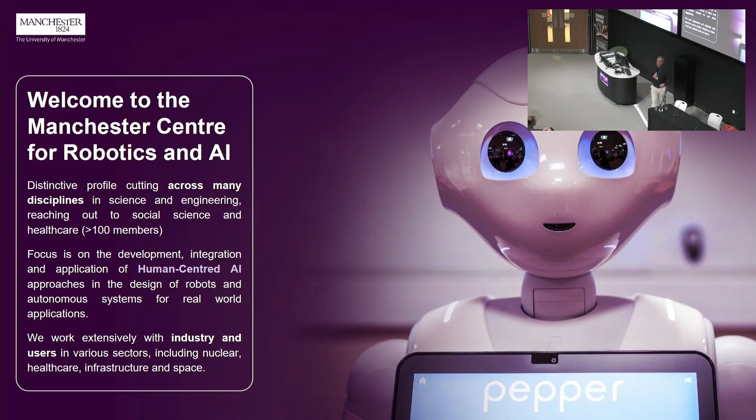We have a very human-centred view of AI - how can we make these robots and autonomous systems do what we want, for the benefit of us, for the benefit of society, in a safe, ethical and reliable way. So there's a lot of activities across the university.

Since we're in an engineering building, I thought I'd show some videos - I'm not sure they'll play, but there's quite a lot of things like underwater robots, for inspecting... they're not playing well. Imagine you could see some underwater robots there.

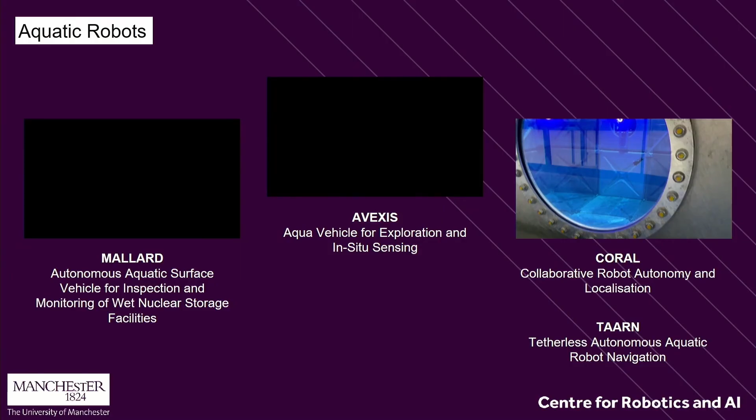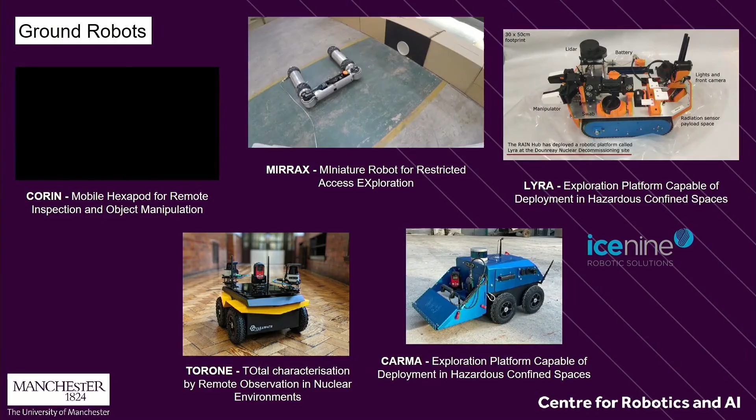Also ground robots for doing things like going into difficult to reach areas - particularly robots for nuclear environments, where you want to reach into areas where it's very hard to get a human in. Obviously it's dangerous, and also hard to get traditional robots in, so you build robotic solutions for that. They're not going to move very well, these videos - sorry about that. Okay, imagine they're moving.

And obviously things like drones as well - drone inspection, but also teams of robots. This example here is where a drone carries another robot that goes down into a cave system or a tunnel system and inspects that. A lot of these are sort of general purpose problems, so we have a lot of robotic systems being developed.

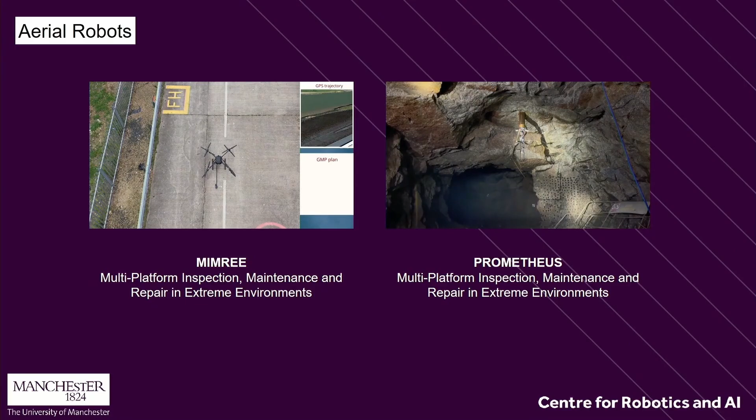We are also the centre of the UK Robotics and Autonomous Systems Network, for those of you who are interested. It's run from here - a collection of all the universities around the UK that are working on robotics and autonomous systems. That's led from here as well.

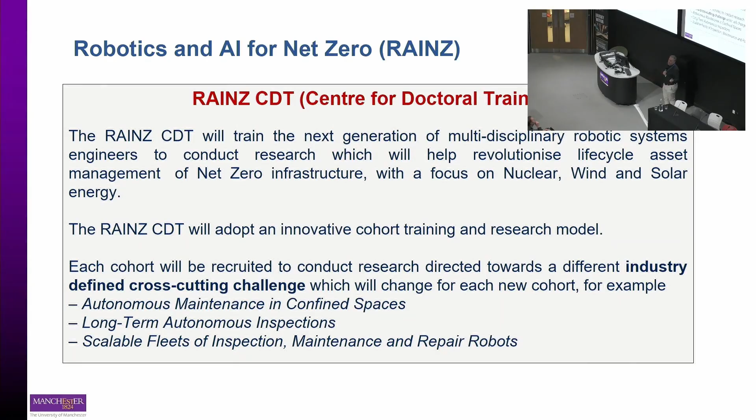We have a lot of training schemes, and this is a new doctoral training scheme, a government-funded activity for the next generation of researchers looking into robotics and autonomous systems. This Centre for Doctoral Training will fund 40 or 50 PhDs over the next 5 or 6 years, something like that. I wanted to mention that as well as building things, we want to make sure these things will actually be used and applied, and so we work with regulators and standards bodies.

We're involved in a lot of standards and policy activities to try and make sure that we're building the things that will actually get deployed, and changing the standards and regulations to make sure we can get them updated for this new technology.

So the last thing I wanted to mention, I'm going to show a video in a minute which will explain these things better than I can—this is the CRADLE project. It's a large collaboration between the University of Manchester and Amentum. Amentum you probably know better as Jacobs before, now it's Amentum, or bits of Amentum, a large engineering company.

Looking at how we can take autonomous robotics—robots that can be remote controlled but can also go off on their own and do things—how we can use those in lots of difficult and unpleasant environments, or perhaps not so unpleasant, but places where people don't really want to be, or where it's very slow to use people.

So obviously examples here like space, nuclear, underground, for example, a lot of infrastructure examples. In this video you'll see some examples of robots used for inspecting tunnels, for flying around to inspect various different areas, maybe even modifying things, unscrewing bolts, different activities like that.

It's up to you how you want to deploy these systems, but understanding how they work, how they should work, how they interact with people at some point—whether it's people telling the robot what to do, or the robot reporting back what it's done after fixing it—is very important. And how they might fail and how you might get them through regulators are all very important.

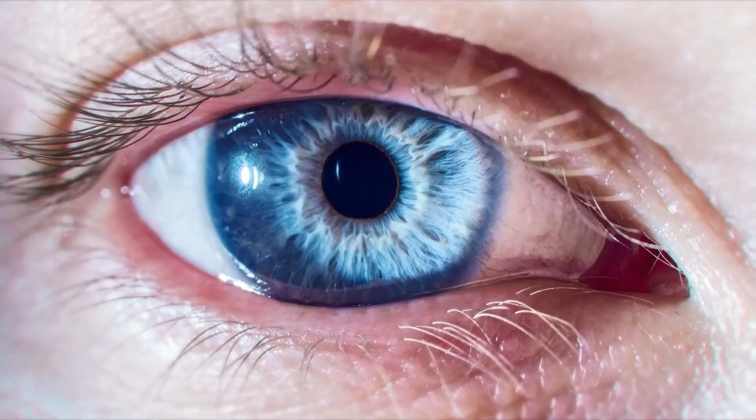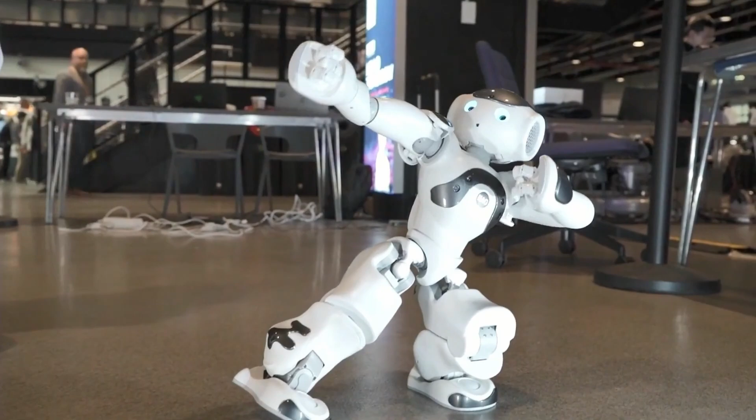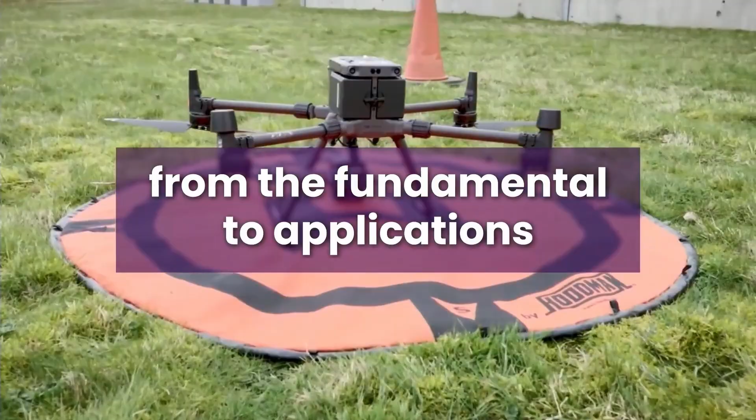The world we live in is rapidly changing, and there is a need for us to adapt using robotics and automation. The Centre for Robotic Autonomy in Demanding and Long-Lasting Environments is a prosperity partnership between the University of Manchester and Amentum, a global research centre led by the future needs of industry to help deliver economic, social and cultural prosperity through the use of robotics and AI. Through ambitious, creative and innovative research, we enable step changes in knowledge, understanding and technology, advancing the field from the fundamental to applications, with several programs for world-leading academics, scientists and engineers. Focusing on dull, dirty and dangerous environments in sectors such as nuclear, space and infrastructure, we help to remove humans from harm. The Cradle Prosperity Partnership is supported by the Engineering and Physical Sciences Research Council and has five work packages.

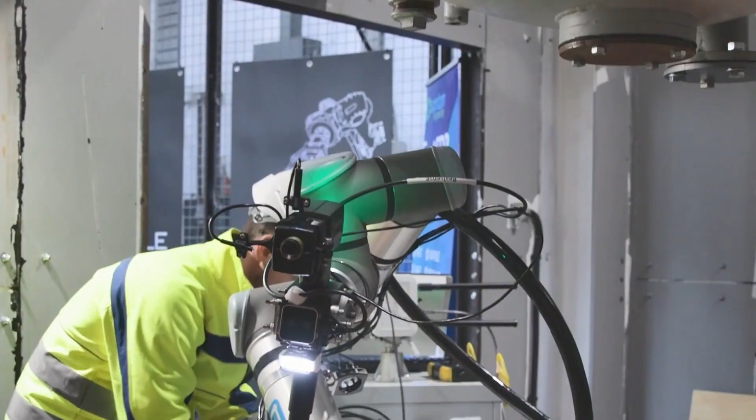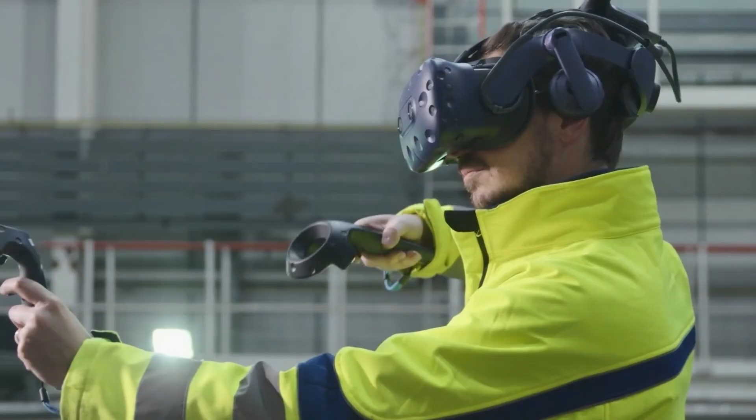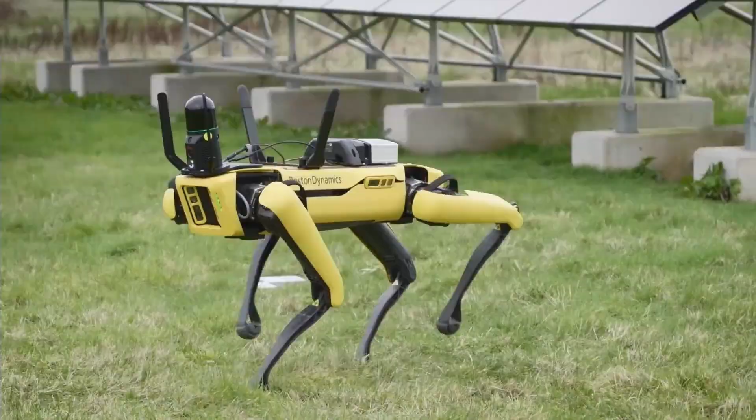Components: improving the reliability of subsystems to ensure mission success. Architectures: designing verifiable software architectures for the reliable deployment of autonomous robots. Interactions: enhancing collaboration by addressing challenges in human and robot interactions for trustworthy and effective teamwork. Assurance: generating better evidence and arguments for ethical, safe and secure design and implementation. Demonstrators: showcasing next-generation solutions, leading to the deployment of robotics platforms in the real world.

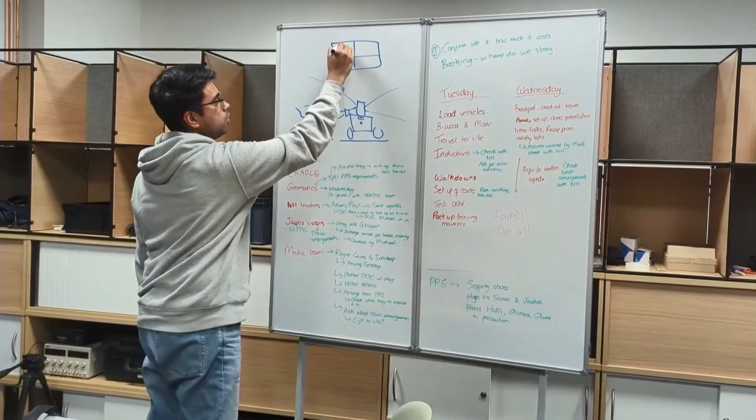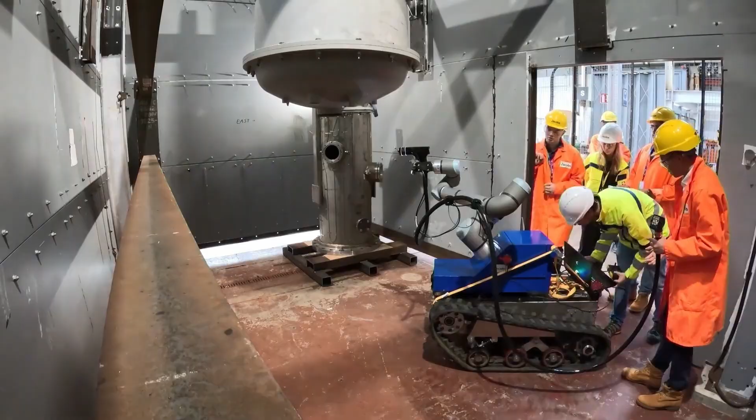We make sure that the challenges we address combine fundamental research with industry needs through our unique Cradle Ideas methodology. By exploiting the joint capabilities of academia and industry, we can deliver immediate solutions, transferring state-of-the-art technology, whilst also identifying future research opportunities. Our vision is to create secure, reliable and resilient robots, deployed in demanding and long-lasting environments, assured by regulators and able to work seamlessly with humans and other robots, to make autonomous robotics the most advanced solution, addressing the challenges required to sustain and enhance our future world. Empowering UK and global industries with advanced robotics and autonomous systems. Cradle. Visit our website to learn more, or visit our stand downstairs to learn more as well.

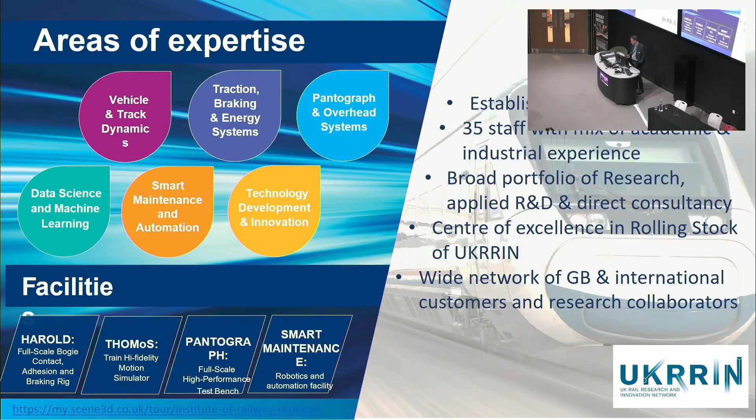So that's the thing I want to talk about today. That was a 1.8 million project co-funded by the Leeds region and the European Union Regional Development Fund. That was a 3-year project to set up a lab environment for robotics centered around rolling stock maintenance. The aim was to improve the efficiency and effectiveness of rolling stock maintenance to meet future challenges.

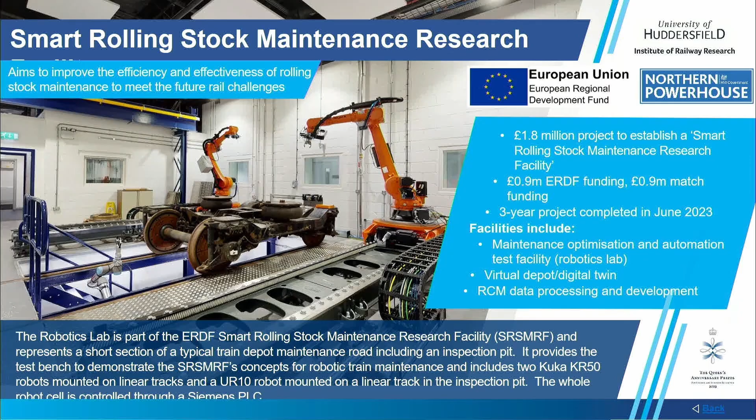That completed in 2023, but it's ongoing now. We've built up links with industry, we've got applied projects, and we carry on with the facility.

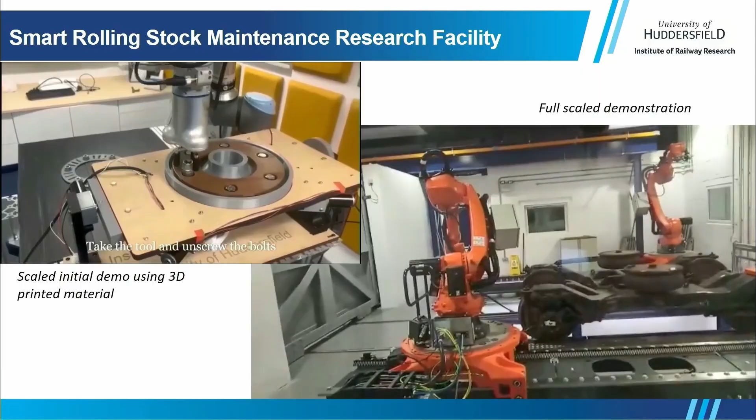We tried this first on a small scale, and eventually we moved to the full-size lab that you see on the right-hand side. At the bottom, you've got a pit, a small pit with a railway bogie, and the 2 industrial robots are moving up and down. Obviously, you would scale that back to a full depot along a train.

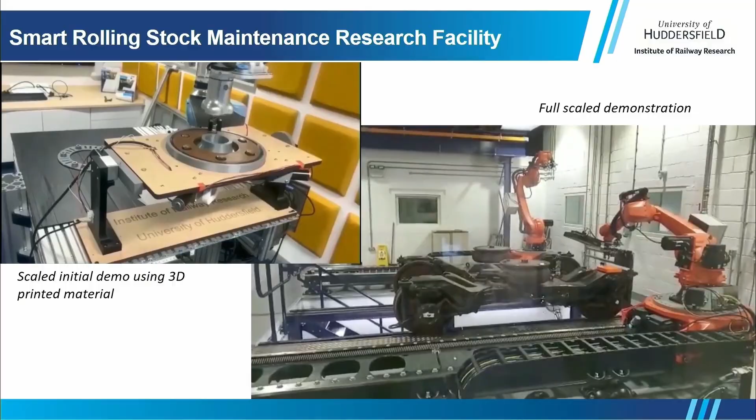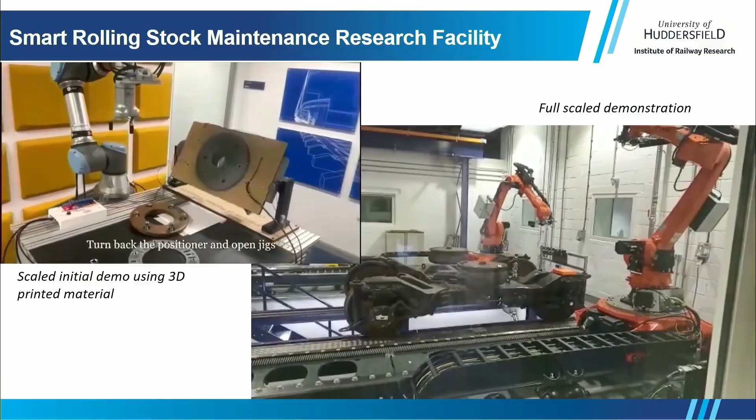But you can see the 2 robots can work in cooperation. There's one underneath in the pit that moves, so it just pops up in between the other 2. The robots can go and pick up the tools they need for inspection or for doing a certain action. You can see at the back the rack has moved towards the robot that's further back.

The benefits of robotics, I guess we're all aware, but increased productivity, the accuracy and repeatability of the maintenance task, reduced workforce exposure to dangerous and repetitive tasks, carry out the maintenance quicker eventually so we can release the train back and help with train availability.

Also, we can eventually maybe connect this with maintenance management tools that we have and remote condition monitoring so that we can improve component life and resource usage.

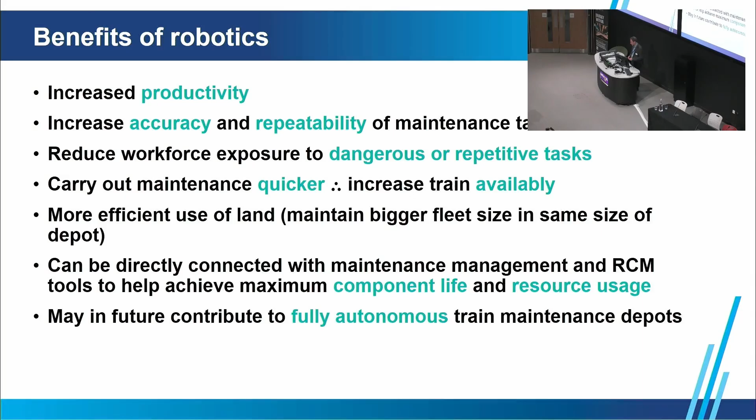Briefly, some of the areas we contemplated and started working on: maybe aspects of cleaning trains, doing inspection of the train, the components, the running gears, servicing the train, refueling and so on, doing regular maintenance checking torques on bolts and things like this, and potentially some of the train components overall.

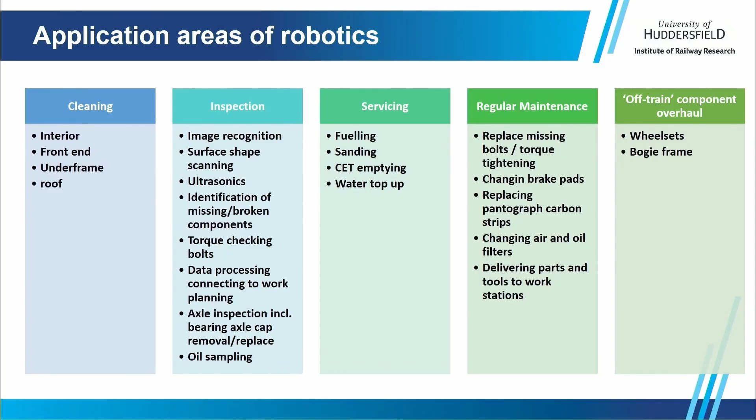Now, if you go downstairs, you'll be able to have a look at this demo. Basically, the way we can interact with the robot - in this case, for example, we've got the AR headset, and the user can visualize the wheel that we are working on.

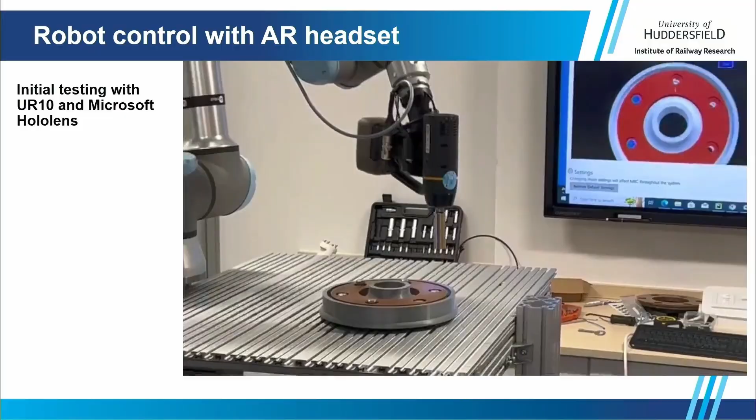You can select different menus of the actions you want to do, and then you pick the bolt that you want the robot to go and unscrew. That's all done - the interaction is done virtually through the headset. So you can be walking around in an environment with this type of headset, like here, for example.

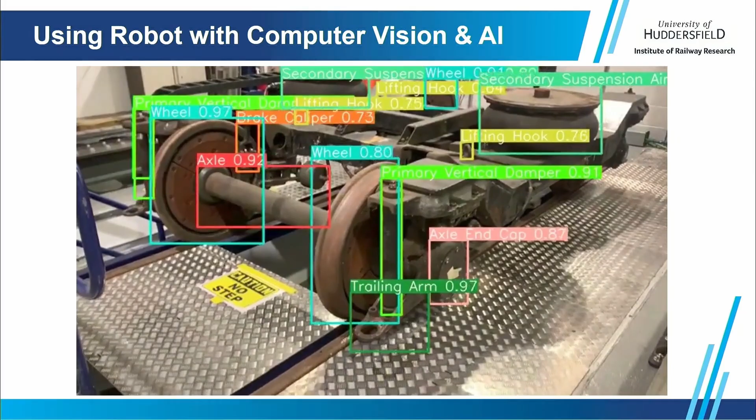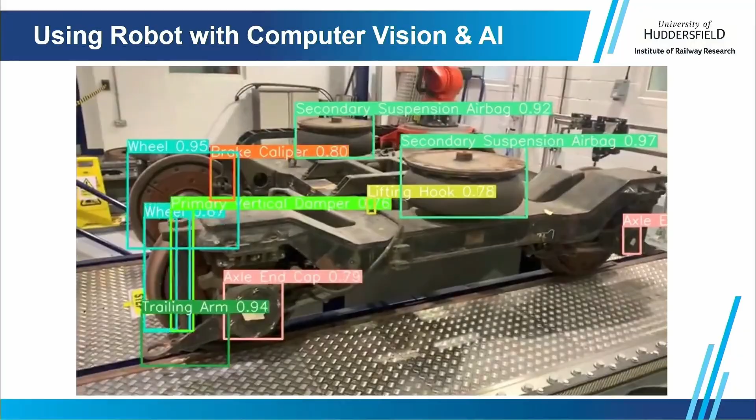Maybe you've got a headset and you can visualize the components. So here AI is being used to check the components are here in the right place - dampers, axle box, the cap on the wheel bearing, secondary suspension, the lifting hook. The number is the confidence of the AI in detecting a certain component, and that is there.

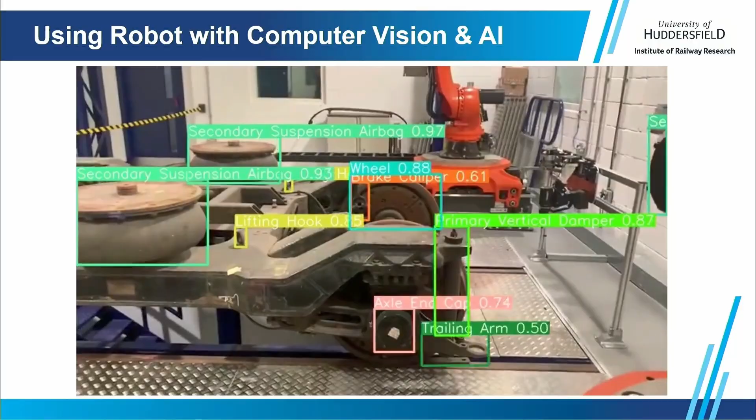So once this is all detected, then you can have a virtual asset with some menu of actions you can then perform and ask the robots to do.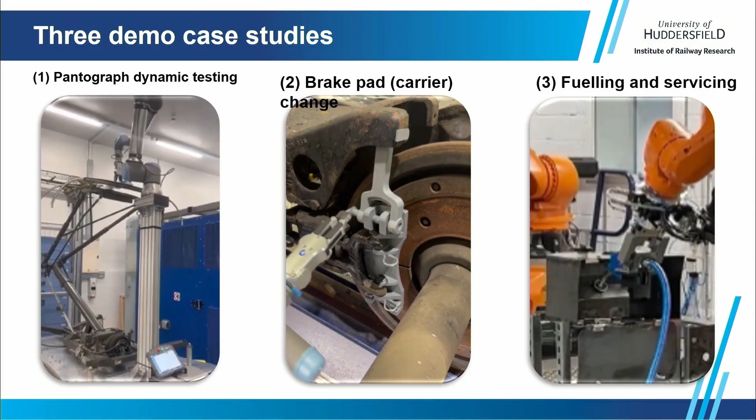Okay, so I have 3 other examples I'd like to go through. The first one is about pantograph testing. Normally a pantograph sits on top of the train and collects the electric power.

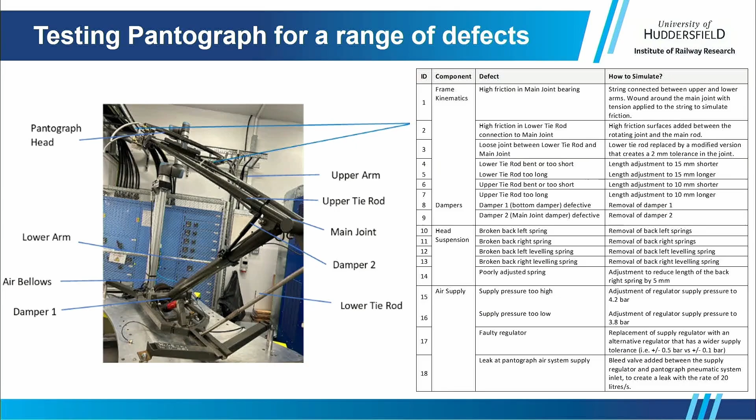Obviously they are mechanical systems, so they can fail. On the right-hand side, we've got a list of the things you would want to find out and detect potential failures and how you would test them. So essentially, we've set up a test where we use the robots to do some of the typical push down.

Normally that's done through a mechanical system or running the train through a lowering wire. Now you could do that through robotics and envisage that maybe you have a robot set up in your depot at the top of the train, it moves, and then you can check all the pantographs as you move along.

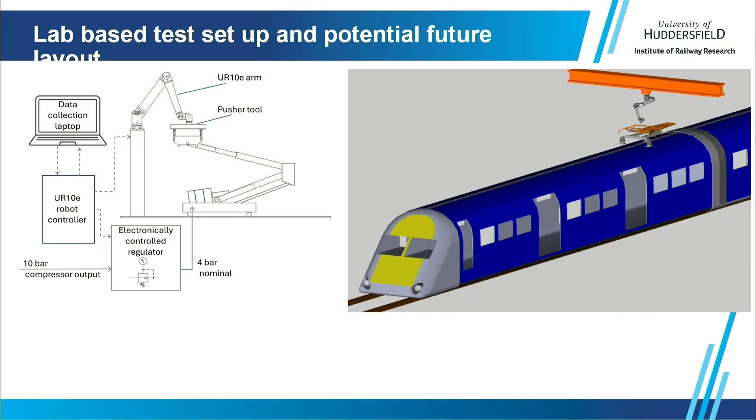So here the robot is pushing down. Essentially we're measuring the force reaction as a function of deflection.

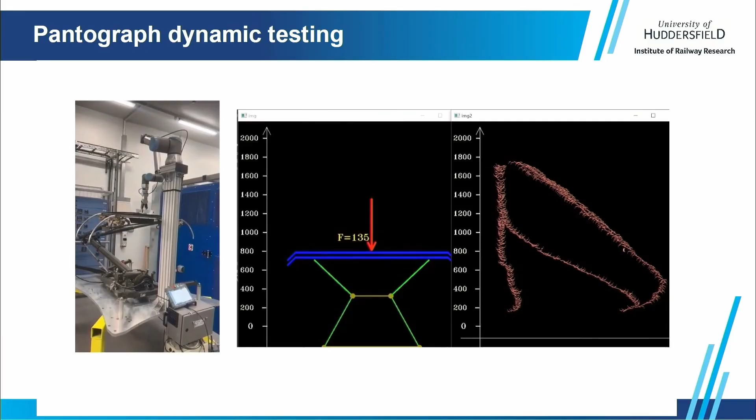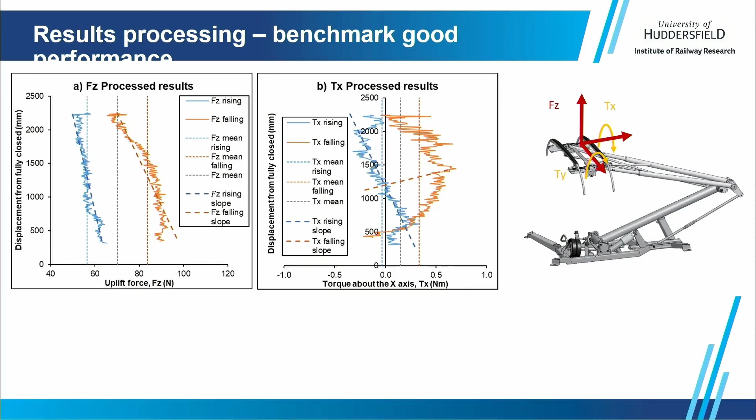Now one of the advantages is that you can do that, but you can also use the robot to test the pantograph in different places or push it slightly sideways to represent the different position of contact of the wire. So you can get actually more data than just a normal test. You can start checking for the torque reaction in various locations, and then build the intelligence around this to detect certain specific faults.

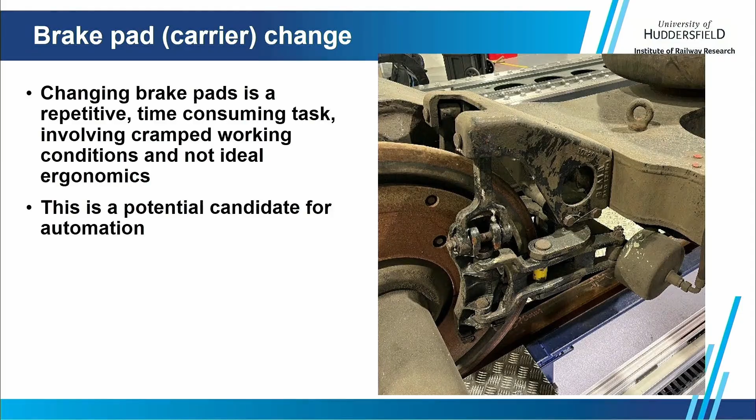Another example is changing a brake pad. I showed a small video of a small mock-up model. We had a student project last year coming from France, spending 3-4 months with us, and he developed this test. Normally you work in cramped areas and it's quite difficult to do manually.

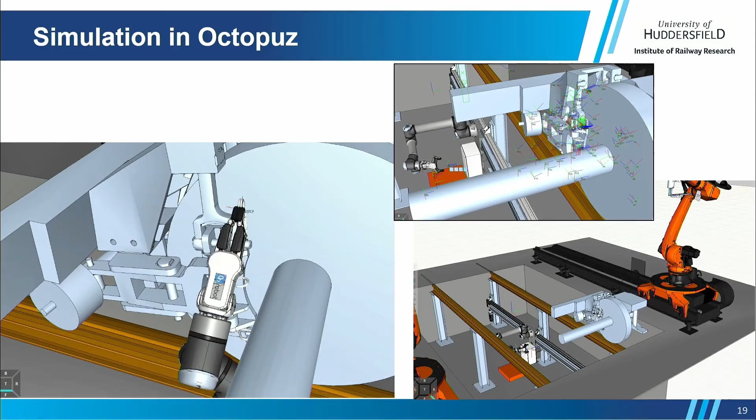So we had to change slightly the design to enable the robots to actually perform the actions. We first model this and we program the robot into Octopuz, which is the software, the virtual environment. So we do that first, and then eventually we can move to realization.

So we printed some of these parts rather than having real ones because we had to make some changes. The robot goes out and picks up the different pins in different locations, and eventually at the end it will completely free the brake pad and then remove it from here.

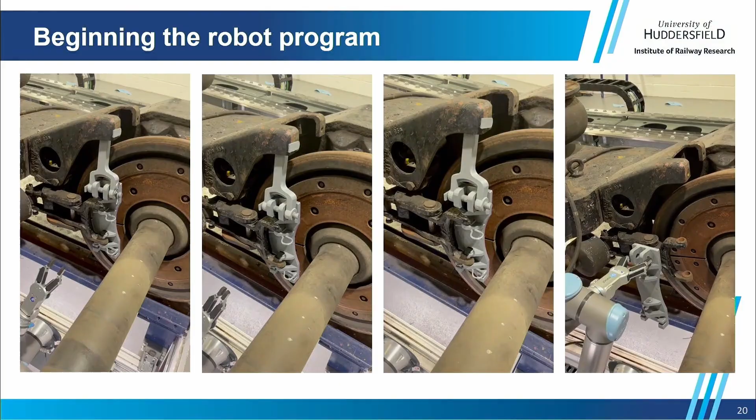So that's one small task. Obviously there's many more steps to go through for the complete removal of the discs and so on, but essentially it proves that it can work.

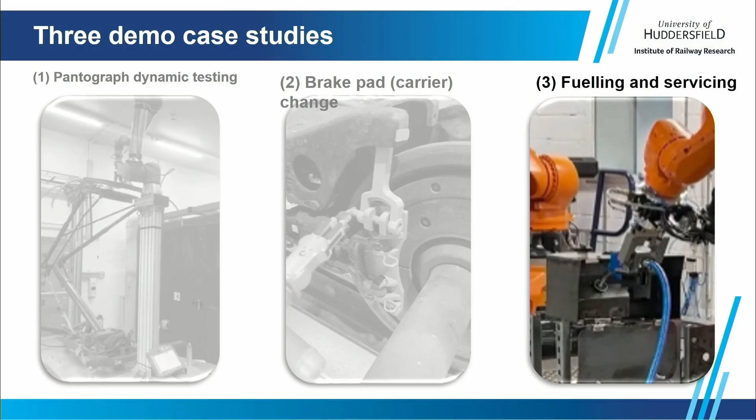And then the final example is about refueling and servicing the train. Again, that's something we've been approached by an operator about, as they were interested in seeing how we can automate this process.

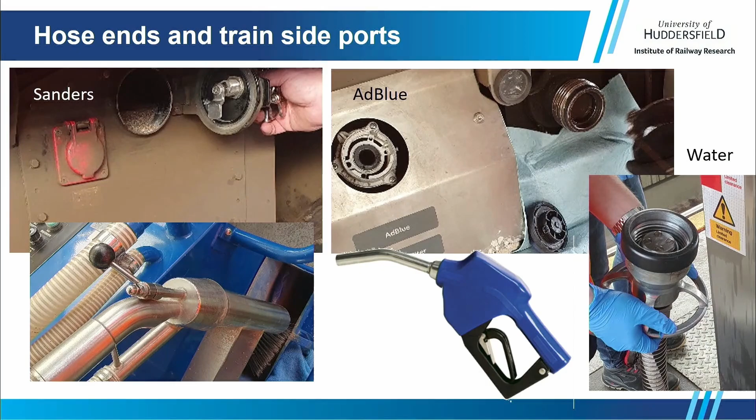So we talked about sanders, so we need sand, so we need to refill this every so often. The AdBlue as well for the diesel, add water to the train, so all these things require operation.

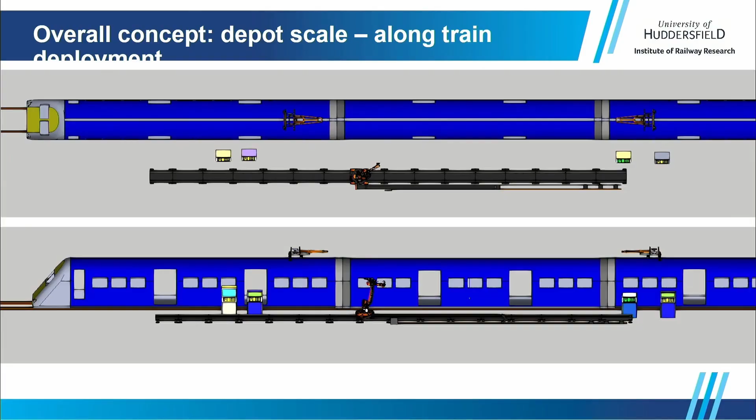This shows you how you would maybe have a robot with long linear guides running along the train in a depot, going to different positions where it needs to perform the action. Again, we use the Octopuz software to model all this.

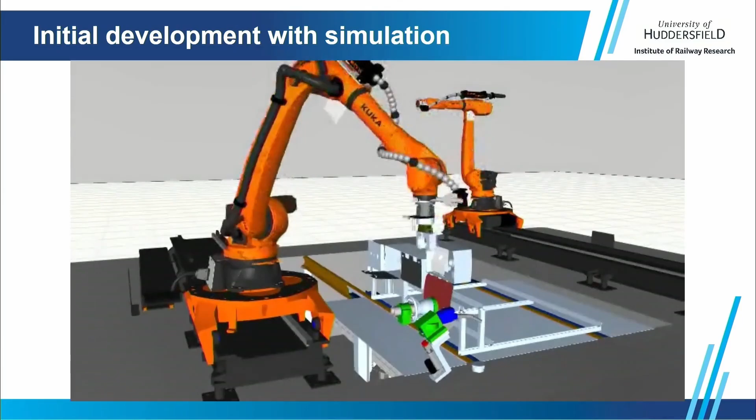So you can see that's our lab. We made up some mock-up cabinets that would sit on the bottom of the train, and then the robots just perform the different actions. We had to make up some specific handles for the robot to pick up the different AdBlue nozzles, for example.

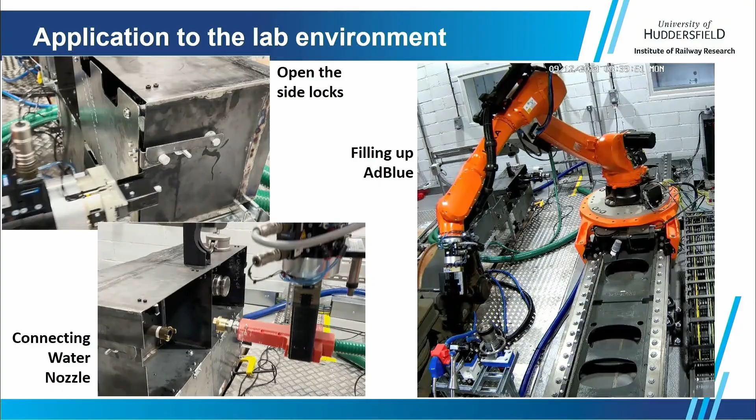And then eventually that's the real application with the industrial robots. So these tasks can be performed at quite fast speed as well. When it's going at full speed, it's quite impressive - it's quite a big robot, but when it moves fast, it's impressive.

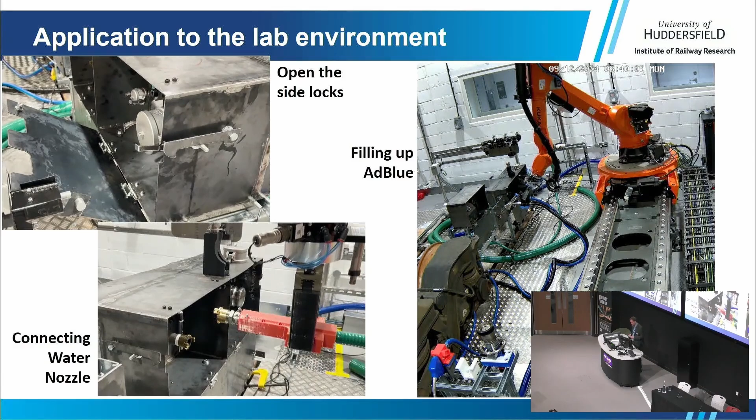On the technical side, just to point out a few, we talked about brakes, for example, but every brake will come back with dirt, will be worn, damaged. So the robots will need to adapt to all of these challenges and conditions, and be able to adapt and try maybe slightly different things every time - not just have a program which is very prescribed.

Trains are not currently designed to accept robotics, so there'll need to be some changes around this and so on. In terms of the business side, well, yeah, there's clearly a lack of demonstrators to show the feasibility. That's why this lab was set up, to really demonstrate the things that can be done.

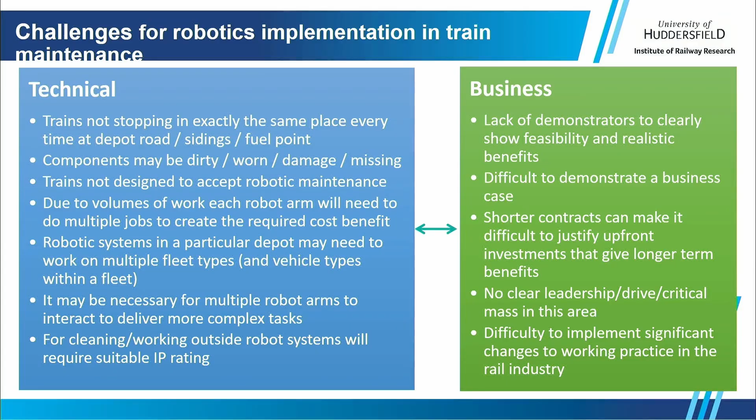Yeah, there needs to be clear leadership as well, and drive to invest in this area, to get a critical mass, to get it going. Okay, I'll just stop here. Thank you very much.